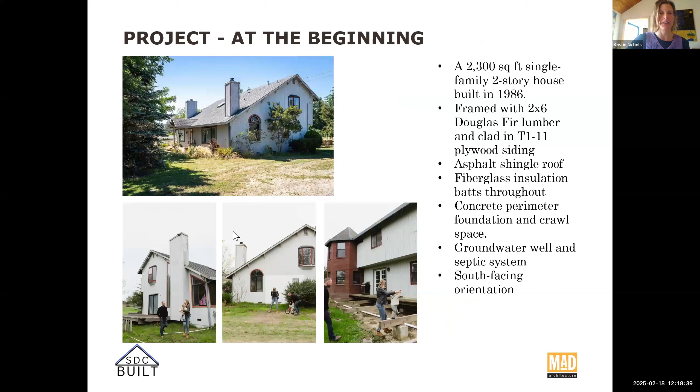So why combine these standards? Well, we found the Living Building Challenge first. What we really liked is that it was this super holistic framework, starting with place, water consumption, energy usage, health and happiness, materials, equity, and beauty. So there's a lot covered. What was not covered is being especially energy efficient. So we felt like Passive House is kind of this missing piece to build even better. And then, quickly, one slide back from our house before, this is the design we came up with.

We still did make changes to the shell. As you can see, we eliminated the eaves to make it look a little more contemporary. We brought down these south-facing windows all the way to the ground, and these two west-facing windows. We added one additional window.

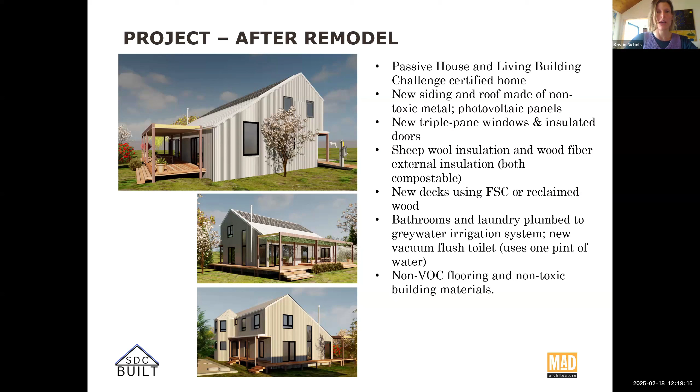And we decided to use metal roofing and siding. We are in a wildfire risk zone, so we really needed to be fireproof. So again, here is the floor plan, this is just the downstairs. This is the before, this is the after.

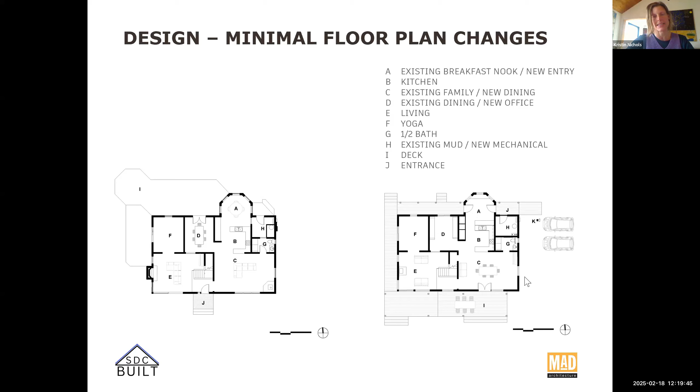We eliminated a primary entrance to the house. We turned this existing breakfast nook into a mudroom and primary entrance. An existing dining room becomes a home office. An existing family room becomes a dining room. And an existing mudroom becomes a mechanical room.

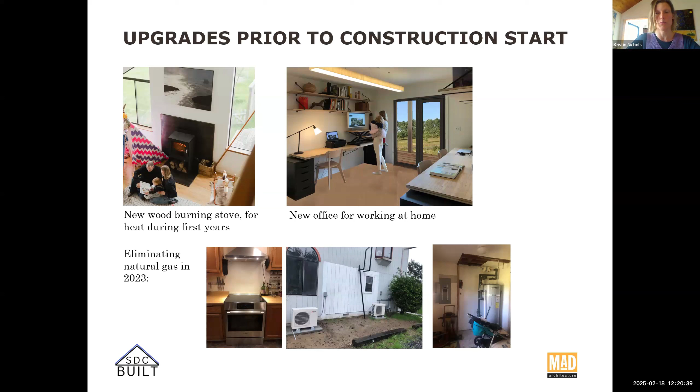We are shading our south-facing windows 100% in the summer, and trying to allow 100% of winter sun in. We are using triple pane windows; using better performing windows was where we made the biggest changes to being more energy efficient. And we are adding exterior insulation on the walls and the roof.

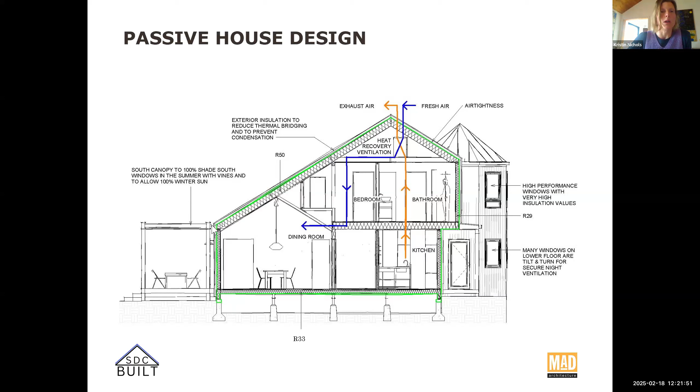So I wanted to talk about some of the takeaways that I've found throughout the construction process. Most of them have to do with retrofits in general, but also when Passive House and Living Building Challenge get layered on top of the project. So first off, it's important to be ready to be surprised. There's going to be things that are unexpected that come up, even in the best laid plans beforehand.

And when you come across something that you weren't expecting, especially from a builder standpoint, we so often can get into the mode of just production and getting to the finish line. But you really have to slow down and rely on the team that you have in place to communicate and solve the challenges at hand.

This first picture here expresses one of these challenges. It's a photo that I took of the east elevation of the structure, just after demo started. You can see we took off the T1-11 on the bottom, on the first floor there, and you'll see in the middle of the photo there's the white tubing coming down. That's the line set from the split system that's installed. The head is up in the attic, serving that second floor.

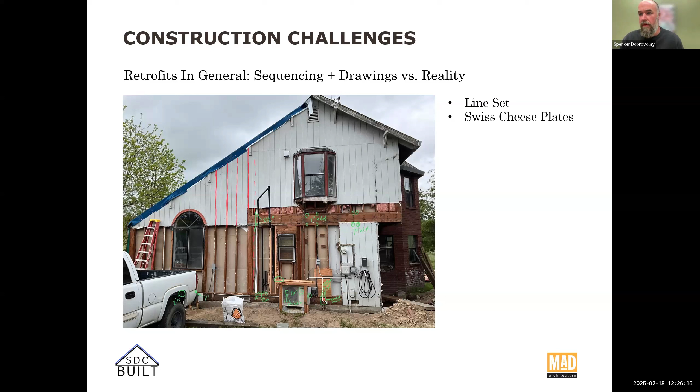So here's another example of some of the challenges that we face. This one has to do with structure, changing structure in a retrofit, but also sort of was led by our passive house goals. I think early on, Graham suggested that we get rid of the existing crawl space hatch access that was inside of the living space and move it to outside of the envelope.

And this is a great idea, especially for passive house, because these crawl space accesses are notoriously leaky and hard to seal well. So kind of getting that piece out of the way, out of your thermal boundary and out of the air barrier layer makes a lot of sense. So you can see the hole below those French doors that leads to the office.

It came up that this was sort of the best location on the house to try to make this change. But it also came with its challenges because it happened to be directly next to a hold down, and it was also a spot that was really close to a step in the stem wall. So again, it just sort of came down to getting things opened up, kind of seeing what we're dealing with, and then slowing down, communicating with everybody.

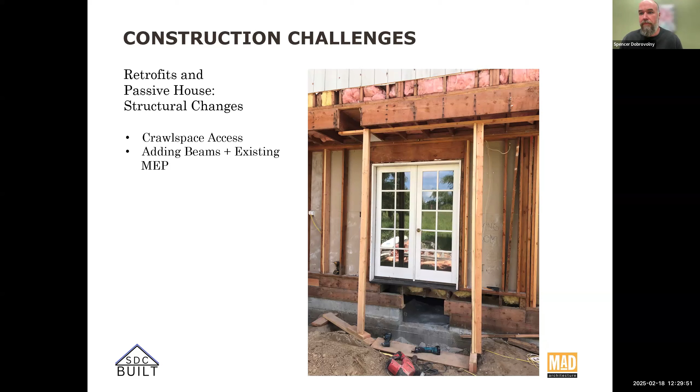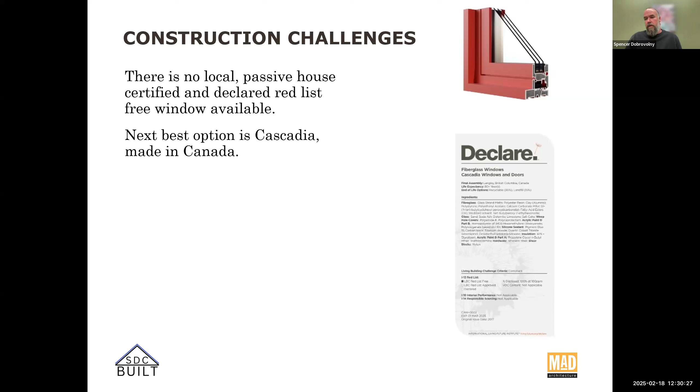So, and then I'll also just touch base on the windows for this project. There weren't a whole lot of options, and by the time I came on board for the project, they were basically selected. We went with Cascadia, and there were a couple of details about their installation that caused some challenges for us in the field. Yeah, these challenges are interrelated with the Living Building Challenge and Passive House goals, as well as the retrofit application.

The installation hardware that Cascadia provides for the windows, there's a sill, like an aluminum angle that gets installed into the rough opening first, and then it gets integrated into your sill pan, and then the up leg of that aluminum angle gets a wet bead of sealant that the window then gets

pushed into. So basically you're creating this wet blind seal at this critical juncture in the window assembly, and it's like the only connection for the air barrier at that point. It's the last line of defense for water management. So first off, it makes it a tricky install because we're used to installing these flangeless windows from the inside, but now we have this bump or curb in the way that we have to lift and maneuver over and kind of wrestle the window back in.

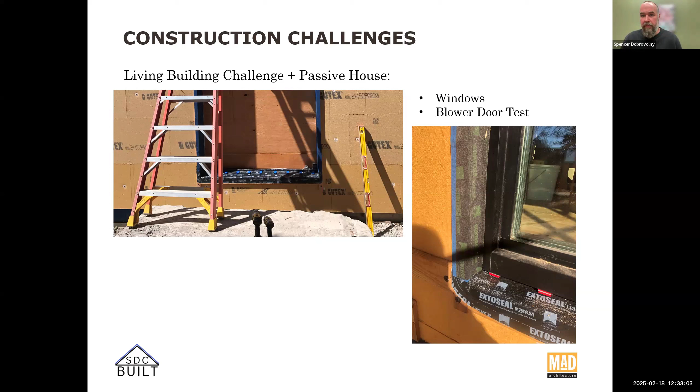And I'll just briefly mention the no eaves thing was awesome aesthetic design, and it actually made things pretty straightforward from a wrapping your layers perspective, easily staying continuous on your air barrier and our continuous insulation from wall to roof. But from a builder's perspective, you know, I like a deep overhang and big eaves. I think it helps protect the structure. So certainly on this project, I was hyper vigilant about detailing of the openings, the windows and doors in particular.

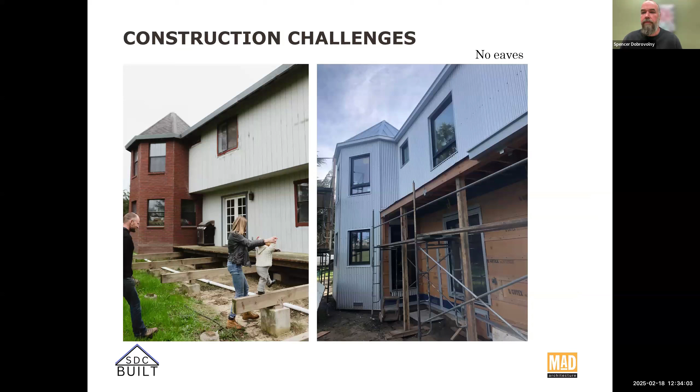Yeah, so we talk a lot about challenges in this presentation today, but we are hoping to inspire people to do the same, and we are hoping by presenting our challenges, we might provide a little bit of guidance on how to solve these issues. I want to talk about how following passive house actually also helps achieve the Living Building Challenge. Under the Living Building Challenge, we need to supply 105% of our energy demand through renewables on site. So of course, it makes sense to minimize those energy requirements in the first place.

Then we also have air quality requirements under the LBC: VOCs need to be under a certain level, carbon dioxide needs to be under a certain level, particulate matter needs to be under a certain level. So having a passive house that's continuously aired out through a ventilation system is helpful. And then using the passive house standard can actually also lower your embodied carbon footprint.

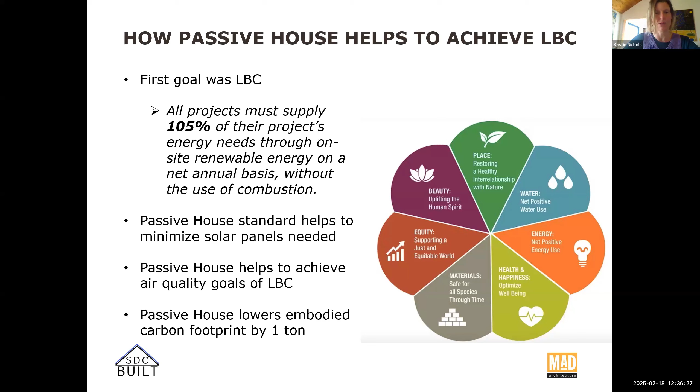So here again, some challenges when combining passive house and the Living Building Challenge. To give you some background about the LBC material requirements, we need to source locally. We have these different contingents, like 20% need to come from within this radius here, and then another 30% from here. So we need to source relatively local. Then 90% of our materials by cost need to be Red List free. And we need to divert construction waste. For example, 95% of our insulation scraps can't go to the landfill. And then in the end, we need to build carbon neutral.

So looking at these requirements, and that was also my biggest learning from this project, we need to use local organic materials as much as we possibly can. Why? Because they are often Red List free. They are often certified compostable. And they are often carbon sequestering. So they can offset some of your high carbon contributors like metal siding and roofing, if you have to use it like us, or triple pane windows.

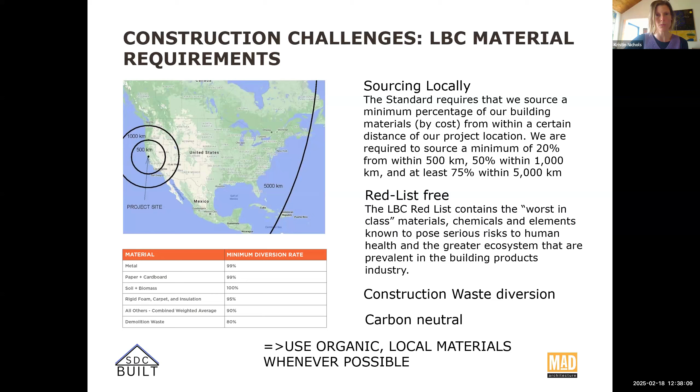So here's one example of such an organic material that we used. That is our exterior insulation. It's wood fiber board.

So of course, foam and rock wool were not options for us because of the toxic ingredients, because of the high embodied carbon footprint that these materials bring, but also because we simply couldn't have achieved 95% diversion rates for the insulation. I had a really hard time trying to divert my construction waste from the landfill, like asphalt shingles or fiberglass. Dealing with these materials and knowing all you can do is bring them to the landfill is so frustrating that it totally pushed us even more towards using organic materials.

Because then what do you do with these scraps? This is my husband and my daughter again, and they are creating these landscape elements. So we dug holes and we just put this insulation material in there. And of course wood fiber insulation board is also non-toxic, and it sequesters lots of carbon.

I don't know how familiar you are with short-term sequestering benefits and long-term sequestering benefits. It's something I'm understanding more recently: the biggest sequestering impact you can make is to take something that would otherwise go into a waste stream. So take these wood fiber particles that would otherwise directly decompose, or take straw, and store it in your building and save the climate.

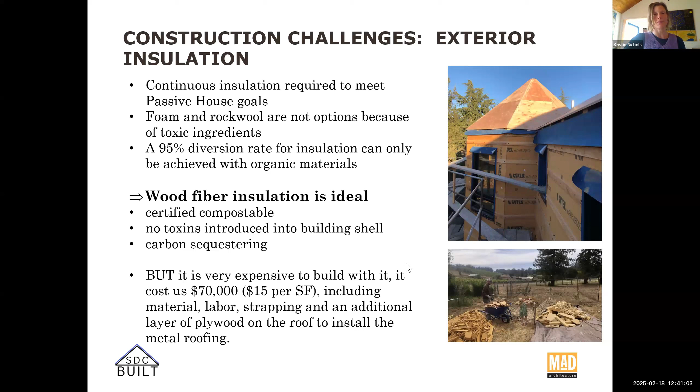So for example, as you can see in this picture, we used all these straps because this is what our structural engineer said: this is what you need to hold back the metal. But then my metal guys only used 25% of these straps. They only fasten their panels every 4 feet. So there's ways to bring that cost down.

Another challenge is passive houses are relatively heavy on mechanical equipment. You need that makeup air system. You need that ventilation system, and every new house needs a ventilation system now. But still, mechanical systems are usually not Red List free, and it's extremely hard to get product declarations on what's in those materials.

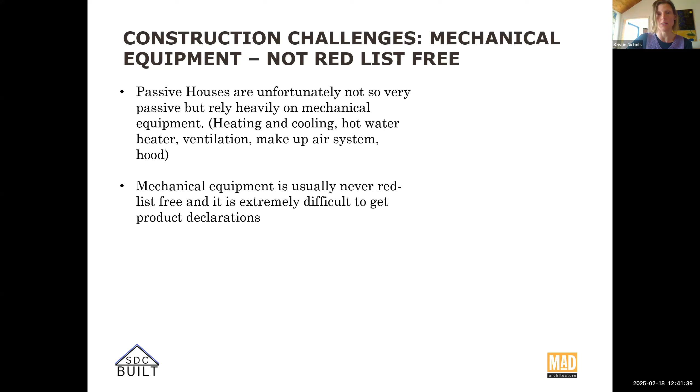We had one guess for why we were so low on embodied carbon, and that was fewer solar panels. Was that close? Do you want to hear some more guesses? Did anybody else guess something? Not yet. Anyone else want to throw an idea out there? It could be the wrong idea. Low carbon siding, less insulation from high air tightness.

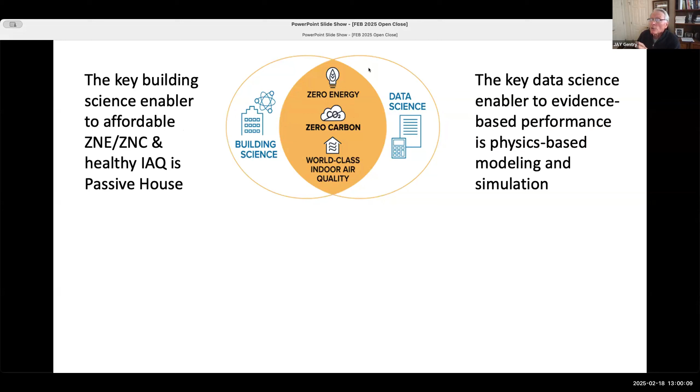The key building science enabler to affordable zero net energy, zero net carbon, and healthy indoor air quality is Passive House. And the evidence-based performance based on physics-based modeling and simulation is what's there. It's really building science married with data science that we're looking for. I'm a big Passive House fan, but I don't say only do Passive House. If you want to do LEED as well, if you want to do WELL because of the water, if you want to do Fitwel, you can integrate the Passive House standards.

And if you integrate the Passive House standards with Living Building Challenge or LEED or any of them, the standard that most affordably enables energy efficiency, healthy indoor air quality, and resilience is Passive House. Also, because it's an aggressive reduction of energy consumption, the path to net zero and net zero carbon is more predictable and less risky. The bottom line is that Passive House works synergistically with the other standards, and because of the higher bar in energy efficiency, healthy indoor air quality, and resilience, you get something that is far better.

A couple of years ago, I had a person from one of the development companies in California. They analyzed 11 of their existing buildings, which were LEED built, and imagined if they had included Passive House for the envelope and air quality. They looked at the points, and of the 11, 5 of the buildings jumped from either certified to silver, silver to gold, or gold to platinum, because they got so many points for those things.

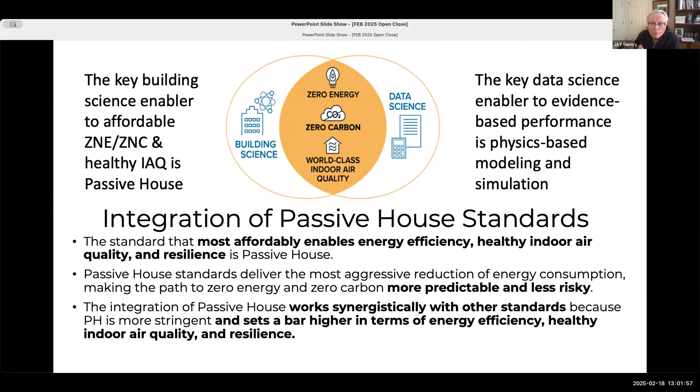It's not true of Living Building Challenge, but of LEED, for example: if you were putting together a football team using a LEED approach, you would get the best possible players at every position, but there's no playbook or game plan. So you may or may not succeed. So integrating Passive House with LEED or Living Building Challenge is a great thing to do.